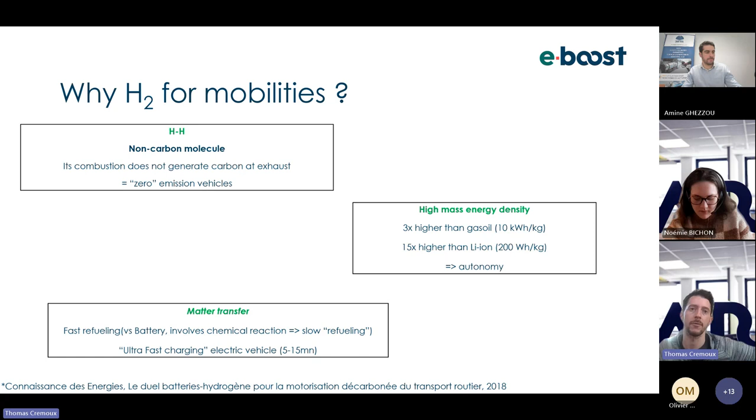Among these heavy vehicles, we have on-road engines and off-road engines. And we don't have to forget that we have a part of hydrogen forklift vehicles, which are already used since many years.

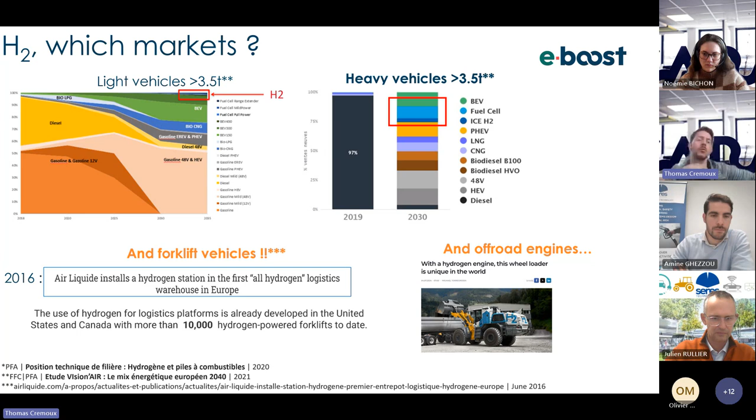2016, I think. But hydrogen has several challenges. The first is it needs a complete ecosystem: production, distribution with pipes, refueling stations, industrial and mobility consumption. It has low chemical stability.

As an example, low ignition energy, 12 times less than gas oil. So it has a chemical energy issue. Moreover, it has a physical energy issue because we have to compress it due to the low volumetric energy density.

At 350 bars, as an example. And finally, the flame is not visible. The molecule is odorless, and it's the smallest molecule possible, so we have micropermeability. So we have to have special processes in industry to manage the hydrogen molecule.

So with safety, I give the floor to Amine, which will present us.

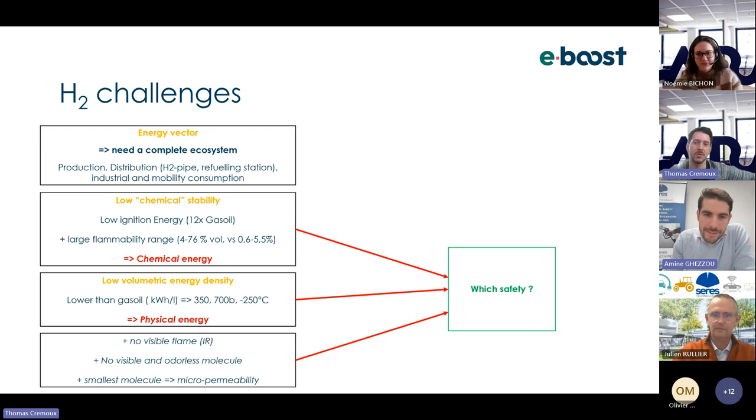Thank you, Thomas. Thank you, Noémie. Do you see my screen? Yes, it's okay, and I will put it in full presentation. Is it in full screen? Yes, yes, okay.

So maybe a short introduction about ourselves. I'm Amine, I'm a safety leader on hydrogen and automotive applications. I've been working several years on hydrogen storage systems, either on automotive, stationary, machinery, and transport of dangerous goods applications.

Actually, I'm a safety leader on fuel cell hydrogen systems, and I'm working at Seres Technologies in the automotive department with Julien Rullier. Hello everybody, so myself, I'm a safety expert on automotive embedded systems, and today at Seres I'm leading the automotive department. I will explain you quite shortly what we do at Seres Technologies.

Seres is a medium company, we are 250 people, and we are working in a group called Groupe Gorgé, which deals with industrial companies such as Exail Technologies that provides submarine drones, mostly for defense, and Prodways that deals with 3D printers.

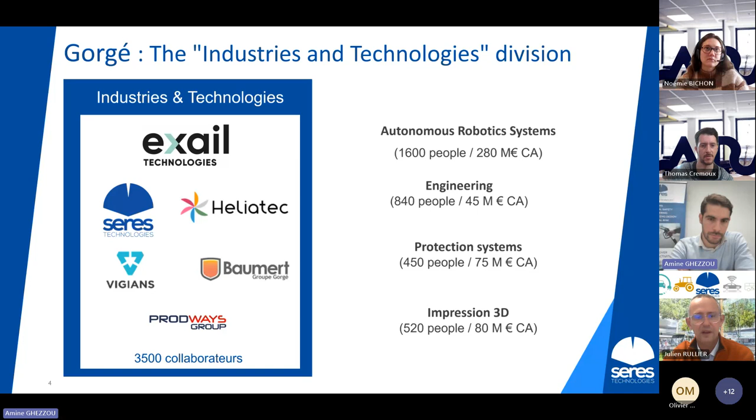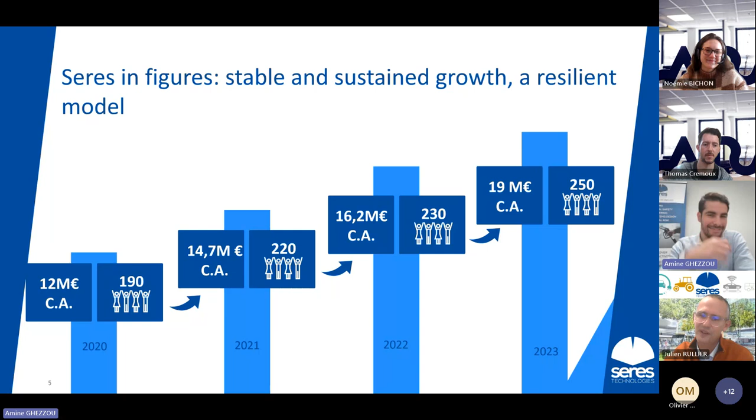At Seres and Heliatec, we are engineering companies. As I said, we are 250 people, and our result in the last year is around 20 million euros.

We are settled all over French territory, and especially in Auvergne-Rhône-Alpes region, in Lyon and Grenoble, but also in Paris and in the southwest of France, and also in Morocco since two years now.

We are working with major companies and also with little companies, startups and new stakeholders in innovative mobility solutions. With most of our customers, we are working on safety subjects for electric or hydrogen solutions, either on embedded systems or ground solutions.

We are involved in different clusters and partnerships: Cara, of course, but also Pôle Véhicule du Futur and Automotive Engineer Society, Agrotechnopole for agriculture solutions, and IMdR, which is the Institute for Risk Management.

First of all, a big picture about the value chain of hydrogen. We have different steps, different projects where we need to first produce the hydrogen by electrolysis or other methods. Then we need to transport this hydrogen either by train, by trucks, or directly by pipings. And the objective is to achieve delivery to the end user.

The end user could be linked to different applications, either industrial applications using hydrogen, or mainly today around the table we speak about transport: cars, trucks, buses, trains, etc.

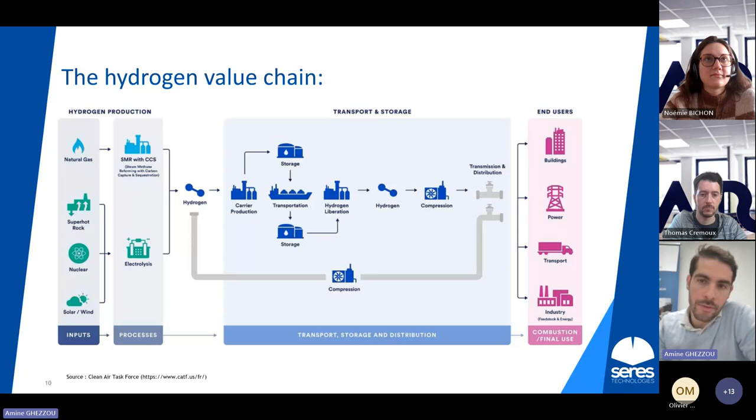So in each step here we deal with hydrogen, so we need to know what are the important characteristics of hydrogen to ensure safety. Here are some points that I want to highlight. First of all, we need to know that hydrogen is the smallest atom in the universe.

That makes the risk of leakage present, because hydrogen will go through a very tiny, small breakage or a small path. So we need to be careful about the risk of leakage.

Then the second characteristic is that hydrogen is difficult to detect because it's colorless, odorless, and tasteless.

And then we have a characteristic that is really important to know about hydrogen, which is the flammability and explosivity range. Here in the picture in the middle, you can see that starting from 4%, which is the lower explosive limit, we can start having a risk of explosion or flame. And this goes up to 75%. This range is really large compared to other gases that we might use.

Maybe an example in automotive, when we use methane or GNV vehicles, the range is 5 to 15% only. Up to 15, we don't have a risk of explosion anymore. Here in hydrogen, the range is really large. So some other characteristics to know.

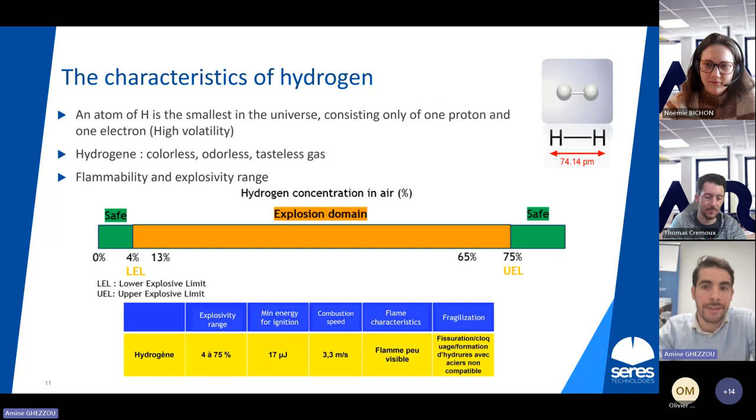So mainly these are the characteristics that we need to know about hydrogen to be able to identify the risks. So the main risk linked to hydrogen, regarding what I said before, the first one is the risk of explosion or jet fire. When the hydrogen leaks and some conditions are met, we can have an explosion or a jet fire.

This phenomenon is described by ATEX. There is an ATEX standard that describes that, and on the picture on the left, we have what we call the hexagon of explosion. It describes what are the conditions to have an explosion.

When we have in the air hydrogen in gas or spray or something like that, in presence with the air at a proper mix proportion, the 4%, for example, and then in presence of an ignition source, we will have an explosion. There is a last parameter, which is the accumulation or the confinement, that is an aggravating factor.

On the right, just a picture to show what a hydrogen jet fire could look like. This one is huge. It could be a pipe breakage, and this is a life situation that we could face in case of crash or drop of a system.

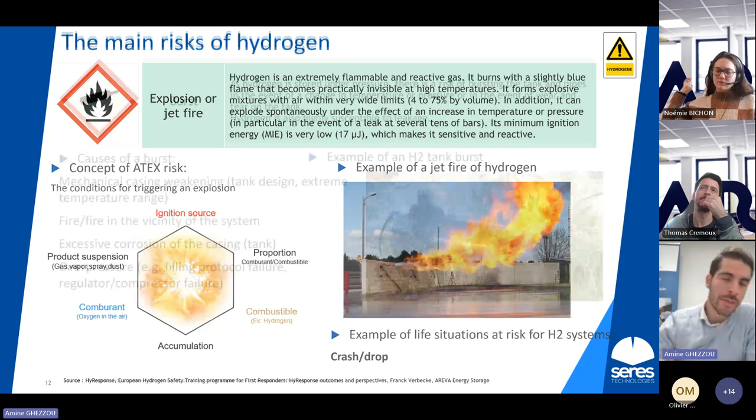The second risk linked to hydrogen application is the burst. This one is not related directly to the characteristics that I've shown before. It's mainly linked to the fact that we transport hydrogen in a pressurized gas situation, so up to 700 bars. So we need to be careful about the tanks to avoid the risk of burst.

There are different causes that can lead to a burst: mechanical wearing of the system, maybe by tank design issue, or misuse of this tank.

What I mean by misuse is using the tank with a flow rate to fill or defuel that is too high, which could lead to really low or high temperatures inside the tank. This is something that can lead to fragilization of the tank and a burst.

There are some life situations also that could be at risk for the tank, which is the risk of fire. If you have a localized fire on the tank, you could also have a burst.

Regarding the tank, there is also the topic of corrosion that could damage the tank and create weakenings.

And the last element is overpressure. The tank is designed to work on nominal pressure, maybe to resist a little bit more, but we need to ensure that there is no failure on refueling stations. We need to ensure that there are mechanical barriers to not have a higher pressure value.

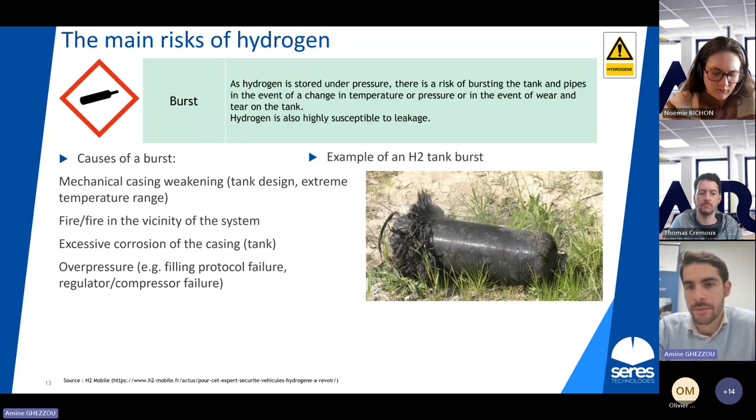And then some other risks without deep diving on them, but important to know. The first one is the risk of anoxia. Anoxia meaning being in an environment where you don't have enough oxygen or air to breathe. This could happen in a closed area where you have hydrogen leakage inside a car, for example, if there is no ventilation.

The thermal risk here is linked to some applications when we speak about liquid hydrogen applications, not pressurized gas hydrogen. We need to have the hydrogen at very low temperatures. In case of leakage, we could burn surrounding people.

Then the last point is electrical risk. It's an indirect risk, not linked to the hydrogen characteristics, but in our hydrogen applications we have fuel cell systems, for example, that generate electricity thanks to hydrogen. So we need to ensure no short circuits and no electrocution of surrounding people.

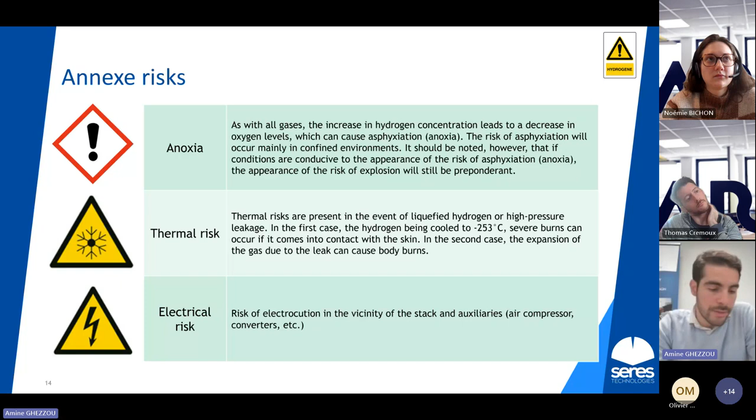So this is a general overview of the risks that we have using hydrogen, but how can we ensure that at the end we have a safe product that we can commercialize? For that, there are methodologies, there are tools, and there is functional safety to help us identify the risks and manage them.

First of all, regarding this topic, one point regarding regulation and safety in hydrogen applications. There are several regulations that you could see on the left side. Depending on the application domain, if you are an automotive application, you need to apply R134 GTR13. If you are on transport of dangerous goods, you need to apply the ADR. On stationary and maybe on machinery, the PED, etc. The list is not exhaustive, and maybe this could be an idea for a future webinar for CARA.

But these regulations cover some design rules, some elements that we need to prove to have the homologation from the authorities. But they don't cover the complete risks that we could have on an application. To do that, we need to use functional safety standards that I will describe in more detail after. But what's important to know is that if we want a homologated system and a safe system, we need to do both activities, regulation and safety.

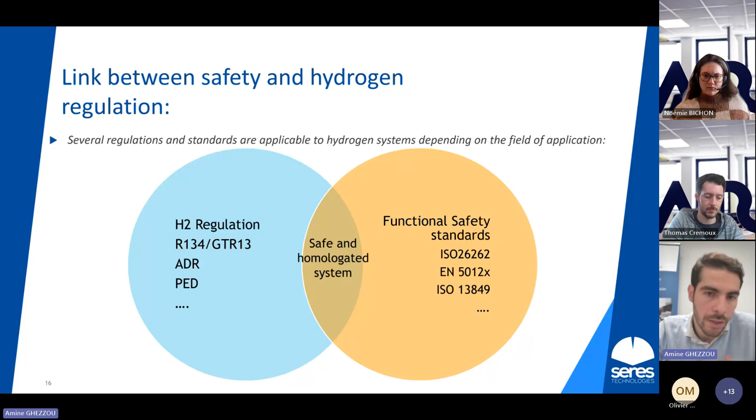So what is functional safety? We try to describe it by a process, which is identifying the risks, having a clear description of them, having a rating also. Not all the risks are dealt with at the same level. Have mitigations in front of each risk, and validate the fact that these mitigations reduce the risk.

In the picture in the middle, you can see the representation of the probabilistic approach of functional safety, where we consider that there are risks that are non-acceptable and acceptable. An acceptable risk is a risk that could be really probable with high frequency, but that could have a really low severity. We could also have risks that are acceptable if they are really severe, but they don't appear at all or at really low frequency. Then in other cases, we have a risk that is not acceptable, and we try to reduce this risk by putting protection or prevention control measures to come back to the acceptable risk.

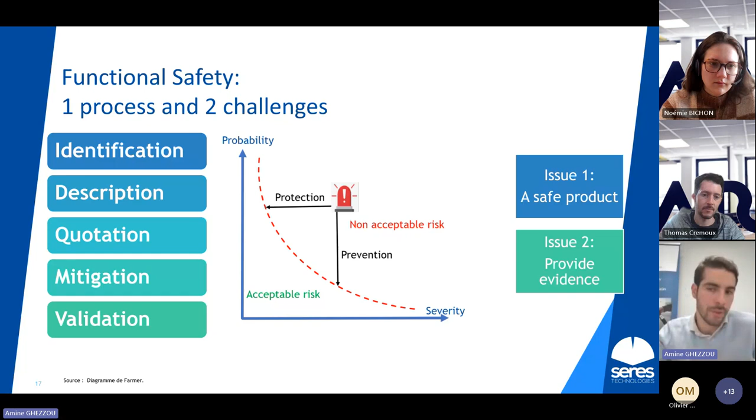Functional safety has two challenges or two aims. The first one is to ensure that the product that we are designing, that we are building, is safe. And the second objective is to provide evidence to the authorities that the manufacturer, the OEM, has done all the proper steps, all the proper activities to ensure that the product is safe.

One element that is really important when we speak about functional safety is the robustness of the safety functions. And here we will speak about safety integrity level. The idea here is to say that not all the risks will be dealt with and managed in the same way in a project. For example, if you pinch your finger in a window, it could be painful, but the damage will not be critical. Another example is braking systems or steering systems. If you have a failure on those systems, the consequences could be really severe.

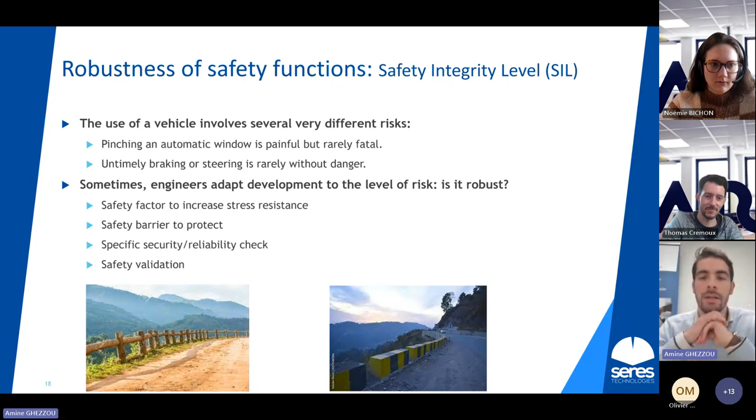We need to ensure that we have the ECU that reads the information at the right speed and sends the order at the right speed to a solenoid valve that has closure and timing characteristics. So this is about

We have different standards and different names and numbers here, but the approach is quite similar. The objectives of these standards are to define a common design and a common process to assess the safety of the system, and it also helps OEMs, suppliers, manufacturers to have the same references and the same language when we speak about safety.

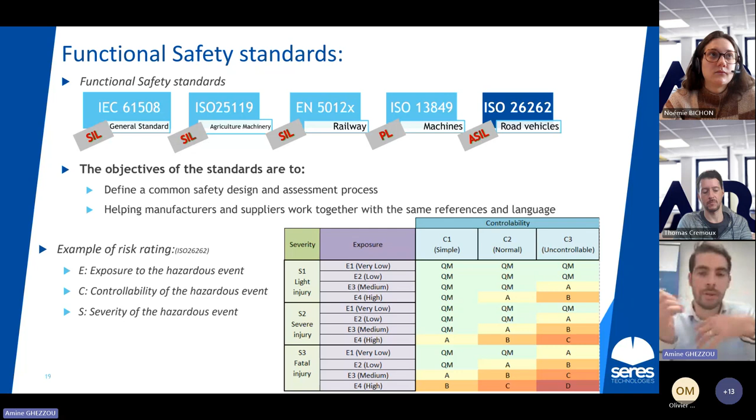And then in all the other situations, if we are able to prove that the exposure is lower, the controllability is better, and the severity is lower, we can have a lower ASIL rating. It's really important to define the SIL or the ASILs at the right level, because one thing that is important to know when we speak about safety is that the SILs have impact on both project and product.

On the project side, depending on the ASIL that you have, you will have impact on the activities that you need to do. If it's QM or if it's ASIL D, you will not have the same activities and deliverables. It will have impact on the planning of these activities, and on the organization of the team also. You will need to have a safety manager on the team, and an independent safety assessor that assesses the deliverables.

And in general, not only speaking about the safety engineer or safety manager, the safety skills and the safety awareness of all the team members need to be adapted to the SIL level that we have on our product. Then the impact on the product itself: because we have a high SIL, we will define characteristics and requirements on the technical aspect of the component.

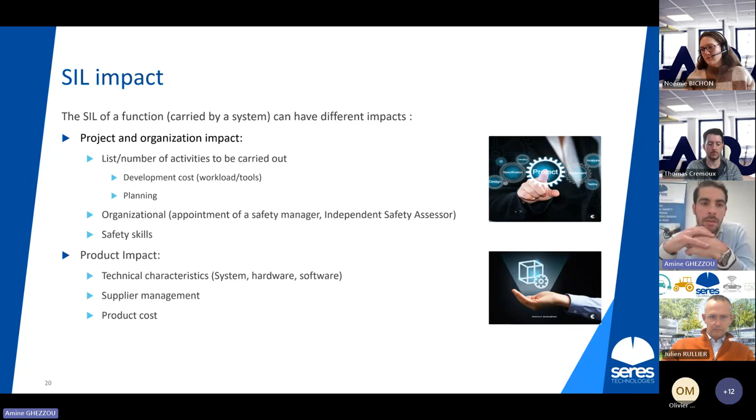We need better hardware, software, materials, etc. We need to deal with a supplier about safety activities. So there is supplier management that needs to be carried out here, and at the end, cost impacts.

One slide about what we call a safety plan. We wanted to give you an overview of the activities that need to be done when you have safety topics on your project. This is a document that needs to be built at the beginning of the project to know what to do, who does the activities, and when. General overview on the chapters.

You need to define the safety organization of your program. What are the roles and the responsibilities of everyone? How the meetings will be done. Having a clear description of the technical project, the scope, the P&ID, for example, when we speak about the hydrogen systems, the architecture, the standards that we need to apply.

Then step 4 on the top, the picture is bigger. It's because here we have the list of deliverables. The list is not exhaustive, but here you will hear document names like item definition, HARA, hazard analysis, to identify the risks and to assess them, FMEAs, the process, system, design FMEAs, and then some specific deliverables that maybe we don't use.